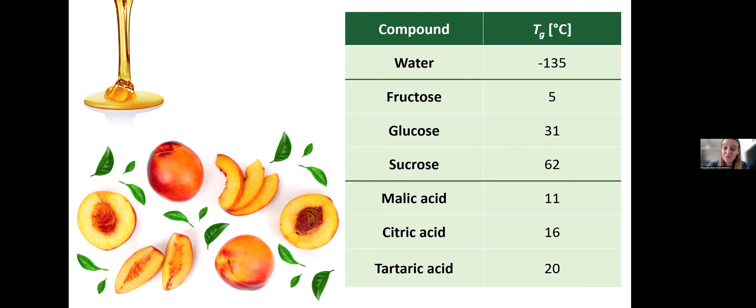This will really be a severe issue in the food industry, as it will create the stickiness problem during spray drying. The powders will adhere to the walls of the equipment inside the drying chamber. They will agglomerate, stick to each other, conglomerate, and at the end exhibit low powder recovery and difficult physiochemical properties to work with in the industry or for the consumers.

So to understand the origin of the stickiness problem in spray drying, I would like to tell you a bit about it. It is essential to discuss the concept of glass transition temperature. This is the temperature, the point below which we will observe the material in its glassy state, the desirable state. It will be brittle, and in the case of powders, it will give us the free-flowing powder.

If the material reaches the temperature above this point, the glass transition temperature, we will observe the rubbery state. The material is soft, flexible, syrupy-like, so we won't get this free-flowing powder that we can easily work with. Definitely it will cause problems with powder recovery as well, as I mentioned.

So what are the solutions normally in the industry, and what is our solution as a team working at my department? To understand a bit more about how and when we observe the stickiness problem, I would like to present you this short graph figure.

You can see that generally when we do not have any carrier in the powders and we have ambient or even high humidity of drying air, we observe the stickiness in the zone over 20 Celsius degrees above the glass transition temperature. If the material reaches this zone, we will observe the problems. The solution to it, especially in the industry, is to add carriers.

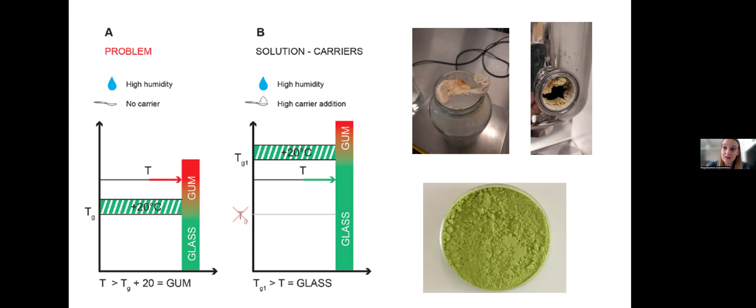However, normally in the industry, to achieve this effect, especially working with ambient or high drying air humidities, the carrier content is quite significant, around 50% of solids of the material.

So what is our solution? What we are working with is lowering drying air humidity. When we lower drying air humidity, it is possible to lower drying temperature. So we are ensuring that we are not reaching this point where we can observe the stickiness.

At the same time, we can lower the carrier content or even eliminate it completely, because it is not necessary right now if we are lowering the drying temperature, as we are moving this point a bit lower.

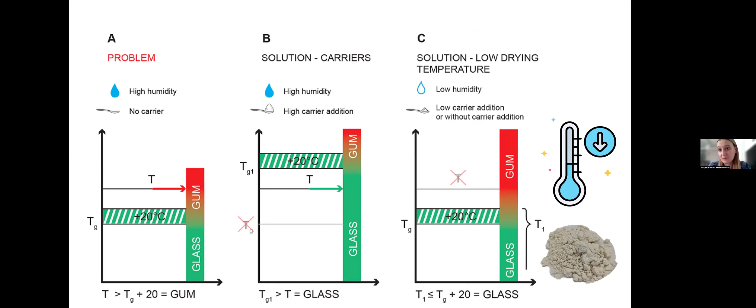In the concept of dehumidified air, basically air dehumidification is not something new. It's not a new concept. It is commonly used in the industry, in research. However, using air dehumidification as a way to lower drying air temperature is quite a new concept.

It was presented by Professor Samborska and Dr. Jedlińska in 2019. As you can see here, we have the comparison between traditional spray drying, SD, and dehumidified air-assisted spray drying, DASD.

In traditional spray drying, the drying air humidity is around 7, 8, 10 grams per cubic meter, depending on the external conditions. The standard spray drying temperature is around 180 Celsius degrees at the inlet, and at the outlet it is around 80 Celsius degrees.

Due to air dehumidification, when the drying air humidity is lower than 1 gram per cubic meter, the inlet air temperature can be lowered to 80 Celsius degrees and the outlet to 50 Celsius degrees. So you can see that the difference and the temperature drop is quite significant.

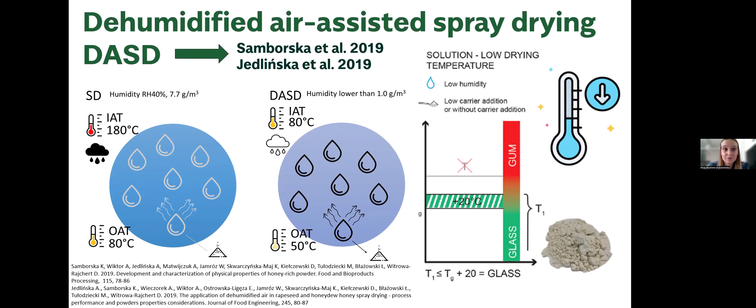As for the integration of this technique to traditional spray drying, it is just an extra unit, the air dehumidification unit, that is added to the traditional spray dryer.

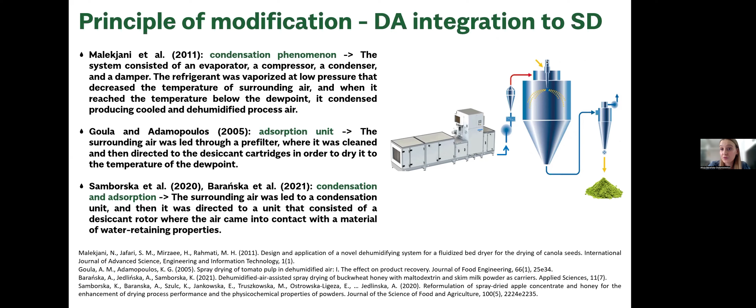Over the years in the research, air dehumidification was used to dehumidify processing air. As you can see here, there are a few different methods to dehumidify processing air. It can be used as an adsorption phenomenon or condensation phenomenon, or, as we are working at our department, it can be both condensation and adsorption phenomenon.

So what actually air dehumidification can solve the problems that we encounter with traditional spray drying. By decreasing air humidity of inlet air, we are ensuring higher driving force for water evaporation. In consequence, we can reduce drying temperature, and then we can reduce carrier content and/or eliminate it completely, which I will show you in a few of our case studies.

And what is the effect of all of it? We can reduce the stickiness problem. This is the most important thing, so we can ensure a satisfactory powder recovery, and we can omit the problems that we can have with handling of powders. In some cases, powder recovery that we observed in these studies was very high, even over 90%.

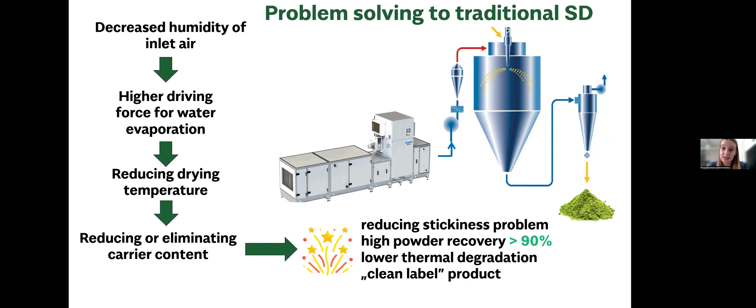With lowering drying air temperature, we can also observe lower thermal degradation of bioactive compounds, which are quite present in the materials that we are working with—fruit juices, vegetable juices, concentrates, etc. And as well, by lowering the carrier content or removing it completely, we can propose to consumers clean label products. They are right now quite interested in these types of products, as consumers have more knowledge.

In this part of the presentation, I'd like to illustrate the potential of this technology by using several examples and case studies. And I will start with the studies that were performed on honey.

Honey was spray dried using, in both of these studies, the traditional method for comparison, and obviously the dehumidified air assisted spray drying. I would like to underline that usually in the industry, specifically with honey powders, we know that 50% or even 60% of carrier per solids is added to the powder, so it is quite a significant amount.

Over here, in both studies, by air dehumidification we could lower the drying air temperature, so it was possible to lower the carrier content even down to 20%. At the same time, which was very interesting, we observed a very high powder recovery, over 80% or over 85%.

At the same time, as you can see at the bottom in this blue frame, these powders that were produced were free-flowing, so we did not observe any problems with their functionality. However, they characterized with quite low glass transition temperature, from around 7 to 20 degrees Celsius. But after producing them, they presented appropriate water content, appropriate water activity, and satisfactory flowability, which ensure the powder's stability.

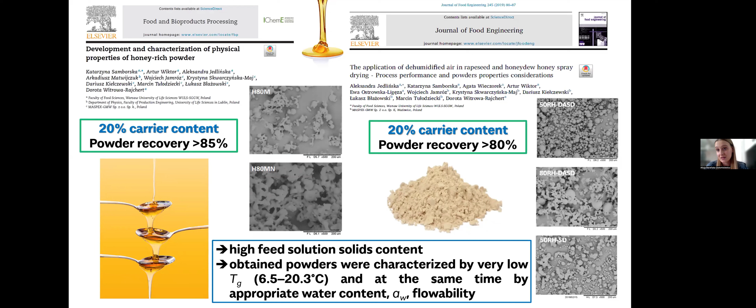Continuing with our work, the idea of eliminating the carrier completely appeared. So the first study performed with no carrier was pure kiwi berry pulp, which was spray dried in comparison using traditional spray drying with high temperatures, and using the dehumidified air assisted spray drying.

Due to the composition of the materials, sometimes it is possible to reduce the carrier completely, but sometimes not—it really depends on the material's composition. Over here, due to the high content of pectins in the kiwi berry pulp, it was possible to eliminate the carrier completely.

At the same time, with no carrier, due to air dehumidification and low drying temperature, we noted very high powder recovery, over 75%.

With sour cherry juice concentrate, which is a very difficult material to spray dry because it contains a significant amount of low molecular weight sugars as well as high content of organic acids, it was not possible to eliminate the carrier completely. However, it was possible to reduce it significantly, especially in comparison with what we observed in studies over the years on sour cherry juice concentrate.

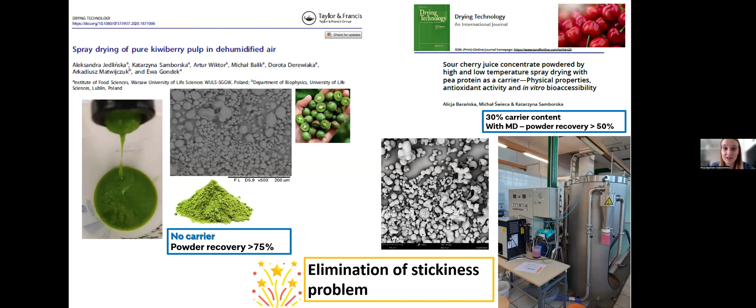As the data that we observed from eliminating the carrier completely, the idea of exploring more materials and seeing how they will react by removing the carrier using this technique.

We also spray dried the cloudy beetroot juice at lower temperature, 130 degrees Celsius. We could also remove the carrier completely, and once again we noted very high powder recovery, over 85%.

We continued the studies and examined purple carrot juice concentrate, mango puree, black carrot juice concentrate, and sauerkraut juice as well, and managed to produce powders.

In some cases, the powder recovery was not that satisfactory, but that was due to, especially for mango puree and sauerkraut juice, low content of solids in the feed material, and as well in the case of sauerkraut juice, a very significant content of organic acid. But as you can see with the concentrate, it was possible to produce powders with very satisfactory powder recovery without any carriers.

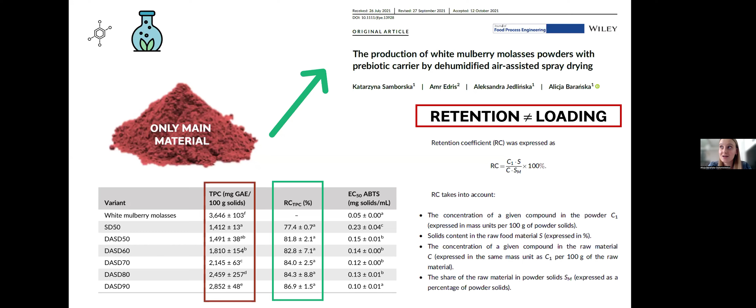Despite the advantages of this technique, obviously there are some limitations we have to think about. I would like to start with the dependence on external conditions, as this process can be sensitive to external environmental conditions because we are using air dehumidification. As we are working with air dehumidifiers, they have their limitations as equipment. If we intend to lower the drying air humidity below 1 gram per cubic meter, or even to 0, and the weather was not favorable that day—it was raining and the external air humidity was quite high—it wouldn't be possible to lower the air humidity to that really low level. That is why this is quite a limitation, dependence on external conditions.

Secondly, the implementation of an air dehumidification system definitely involves additional equipment costs, which has to be considered, especially for industrial application.

In a second, I will talk a bit more about energy efficiency, storage, and retention coefficient, the problems that we observe with retention coefficient with dehumidified air spray drying.

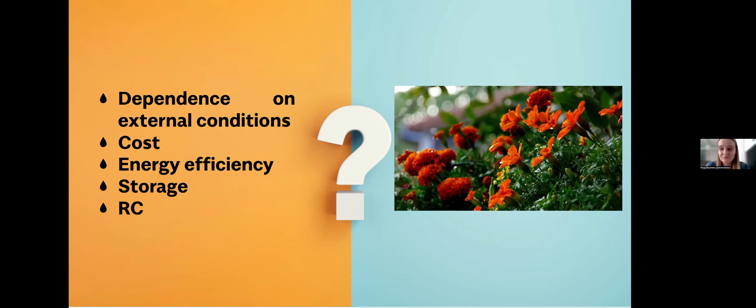In this research, buckwheat honey was spray dried with two different carriers, maltodextrin and skim milk powder. The honey was spray dried using traditional spray drying, SD, and using this technique of air dehumidification, DASD. In this research, we verified how the energy consumption, specific energy consumption, and energy efficiency change due to the change in method.

Especially for implementation in the industry on an industrial scale, the application has to be carefully deliberated because we observe low energy efficiency, but at the same time we know there are very important benefits, such as increasing the content of the raw material in the powder, increasing the antioxidant activity of the powder and its potential bioactive compounds. But as a disadvantage here, you can see the energy efficiency is quite low.

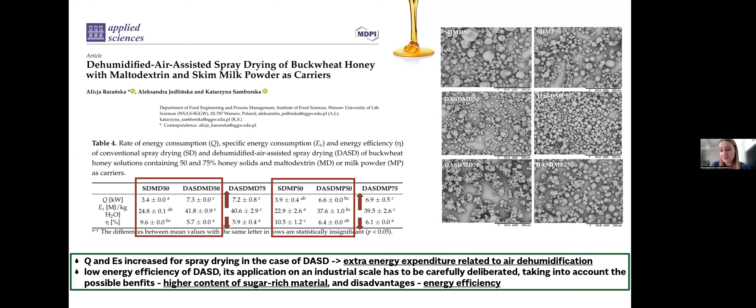With the retention coefficient, something that has to be studied more is definitely how the dehumidified air influences this parameter. In the case study on sour cherry juice concentrate, where different dairy byproducts were used as carriers, we used chromatography to verify the bioactive compounds content in the powder in comparison with the sour cherry juice concentrate.

This really highlights the complexity of the spray drying process, and definitely this problem shows there is a need for further systematic research - what really happens during spray drying, that even though we are lowering the drying temperature, we do not see the higher retention coefficient, especially when we are excluding the carrier from the calculations.

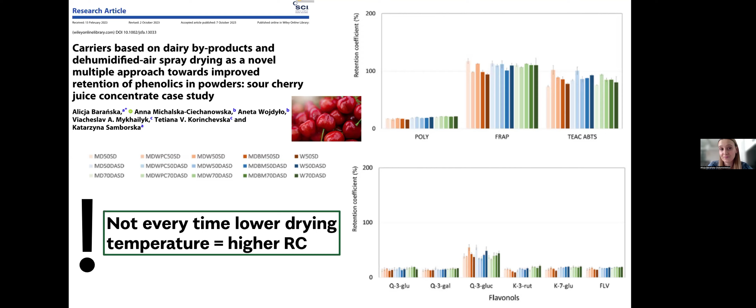One last thing I would like to mention is storage. It is a very important issue, especially for then handling the powder. Obviously, when the amount of carrier is reduced, additional challenges may arise during storage, because powders with lower carrier content may be more prone to caking due to water absorption.

Water is characterized by a very low glass transition temperature, minus 135 Celsius degrees. So if the powder absorbs water, the overall glass transition temperature will decrease and we'll observe caking and problems with handling. So definitely the storage conditions and packaging must be well thought through.

Especially in the case of powders with reduced carrier content. But what has to be studied more as well is that we do not observe right now lots of studies performed with air dehumidification in spray drying, and how it influences the physiochemical properties of powders and how they behave in storage. So this is something that has to be studied more - how to properly store the powders and how the process really influences the storage conditions, packaging, properties and handling of powders.

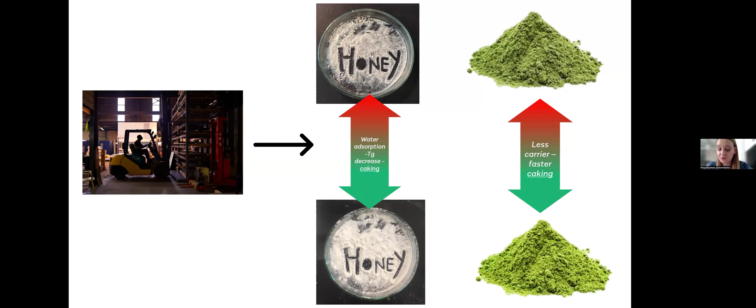I would like to mention one last thing, the industrial application. What we know from the literature about application of these methods, the air dehumidification system, is that 2 dairy cooperatives in Europe, in the Netherlands and in Poland, have for quite some time been using an air dehumidification system for their spray drying towers.

However, what we do not know from the literature is whether they are really using it to lower drying temperature. Most likely they're using it to control the humidity of drying air, not necessarily to modify the drying parameters. And as you can see, we do not find literature on application of air dehumidification in, let's say, production of fruit powders, vegetable powders - the sugar-rich materials that are really difficult to dry.

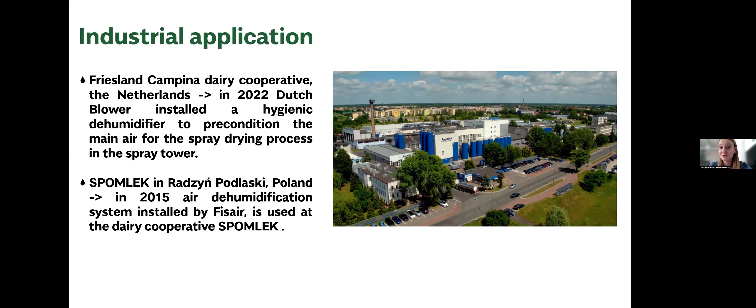To conclude this presentation and the research on dehumidified air-assisted spray drying, I would like to underline the most important thing to be taken from it: this technique resolves the issue of stickiness of food powders, and at the same time ensures very high powder recovery, in some cases even over 90% powder recovery.

Due to lowering the drying temperature, we observe lower thermal degradation - which is not of bioactive compounds, but it is not the same as retention coefficient. But what is really very important is that due to lowering drying temperature, we can lower the carrier content and increase at the same time the raw material in the powder. So we can increase the bioactive compounds potential in the final product, which would not normally be achieved using traditional spray drying. So that is very important.

Due to that, dehumidified spray drying creates the possibility for production of functional clean label products that are right now quite popular on the market. But at the same time, extra energy expenditure has to be taken into consideration, especially for industrial application, because we have this extra unit and extra process of air dehumidification. And as I already told you, with retention coefficient, we know that lower drying temperature does not always translate into higher retention coefficient, and this matter has to be studied more.

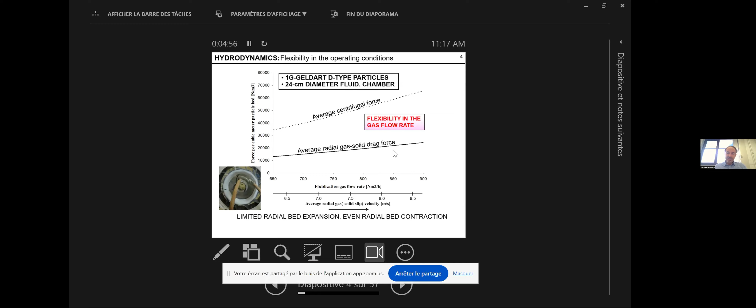So anyway, we use that principle again for coating fine particles. The problem with fine particles is that you need to work with thin slots, because you need to inject an awful lot of momentum for a given gas flow rate.

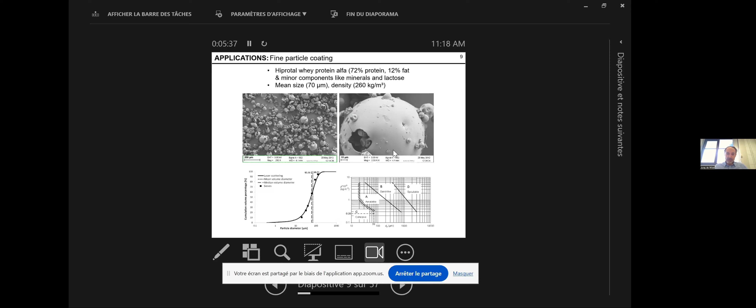So you can play with the momentum injected versus the gas flow rate injected by just decreasing the slot size or the number of slots. You inject the same gas at higher velocity, which allows higher momentum, keeping the ultrafine particles inside. The price you pay is pressure drop, but that's something you have to accept to treat such fine powders.

So we just put a nozzle in the center of this vortex chamber—this is the vortex chamber, and here you evacuate the fluid. We put the nozzle in, so we were in fact top-spraying onto the rotating bed, and then varied the conditions.

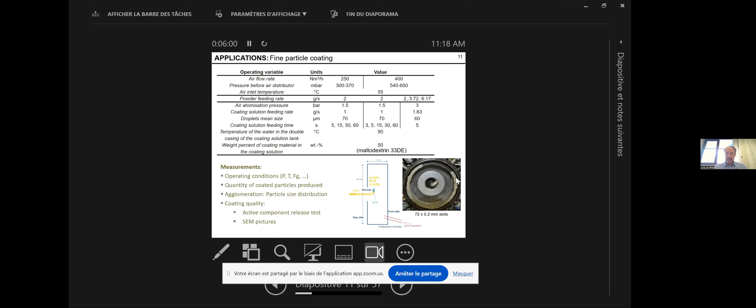They're in this table, but I can't go into detail. We tried to figure out what range of liquid and gas flow rates, and what residence time, we needed to coat the particles properly, and in what range of operating conditions we could keep the bed stable.

At too high liquid flow rates, the bed is not kept—there's too much agglomeration. But within given ranges, you can manage the drying rate so that you don't have too much agglomeration and you keep the bed fluidized.

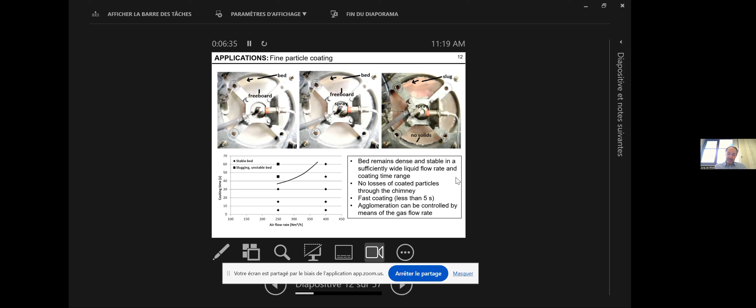So we had to find out how to properly agglomerate and coat the powder. We could control the agglomeration just by playing with the drying airflow rate—this is the gas fed into the vortex chamber. By increasing the airflow rate, you dry faster and have less agglomeration, which is what you see here.

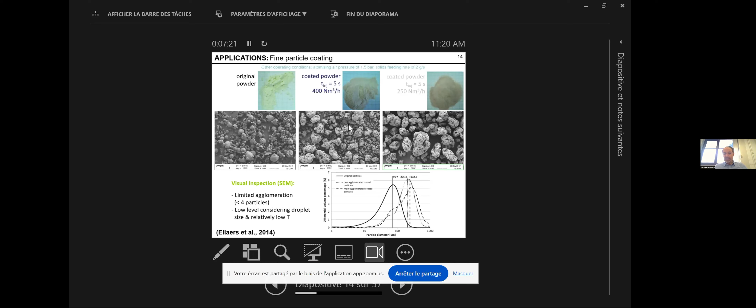At lower airflow rate, you dry a little bit slower and have somewhat more agglomeration. Here you have really minimum agglomeration. We had a very fine layer deposited, you see that here. The particles were on average, I think, 70 micron, and we deposited a layer of 1.2 micron on those particles, with very few cracks, resulting in 60% reduction of the release rate of an active component, which was fat, if I remember well.

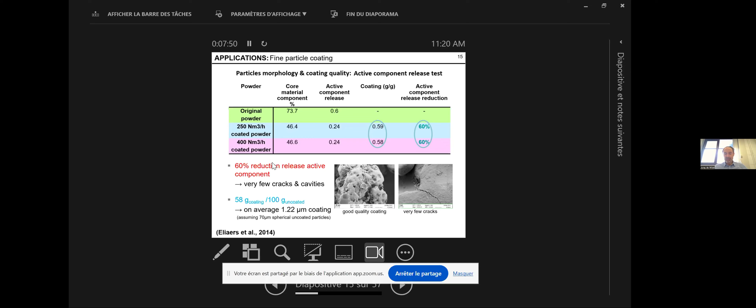From that, we started working on spray drying, and that is a totally different application because you work under dilute conditions. So far we focused on dense beds, dense rotating beds. Here in spray drying, you work more dilute. That has as a result that the rotational speeds in the chamber become much higher. You can imagine that if you have a high mass of particles in there, it slows down the rotational speed, but in spray drying applications, it's more dilute.

The objective here from our collaborators was to reduce the size of spray dryers and, if possible, improve the energy efficiency. We tried different concepts. We started from where we were working in coating and tried axial multi-zone operation.

From the beginning, we had in mind to work with drying in two steps: a fast initial drying with hot air and then a final drying with more mild temperature air. The reason for that is that you have to very fast form an initial particle, an initial crust as we call it, because as soon as the particles are evacuated towards the periphery, they can touch the walls and they should not stick. If they are not dry, you will form a paste on the walls.

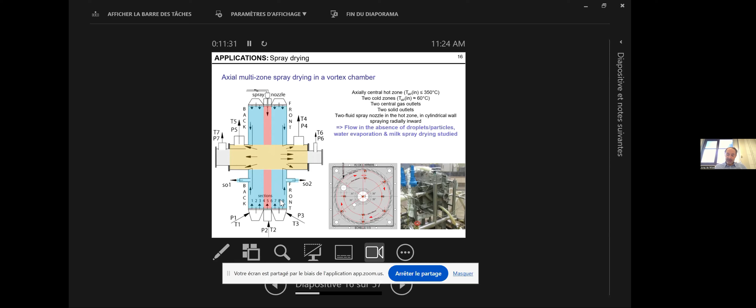In a radial multi-zone dryer, we again have drying in two steps: fast initial drying in the radial center, and then final drying simply in the periphery. The idea is to have a fast evacuation from the central zone to the periphery thanks to the centrifugal force. And so in this central zone, how do you generate the centrifugal force? By injecting mild temperature air in the periphery through vortex chambers.

So we have mild temperature air in vortex chambers in the periphery. That generates a centrifugal force. Droplets injected in the center will start rotating and be very fast evacuated to the periphery, in milliseconds. During that time, in the center, we contact that with hot air that we inject countercurrent with the droplets, and that hot air we went up to 450 degrees C.

That accelerates the drying as well, so we have very fast drying in this zone. Now, it is not because we inject hot air here that it is hot here - it is the drying that will determine the temperature in this zone. You will see in the graphs, the temperature measurement graphs that I will show, that the drying cools down this zone, and then you avoid degradation of your material.

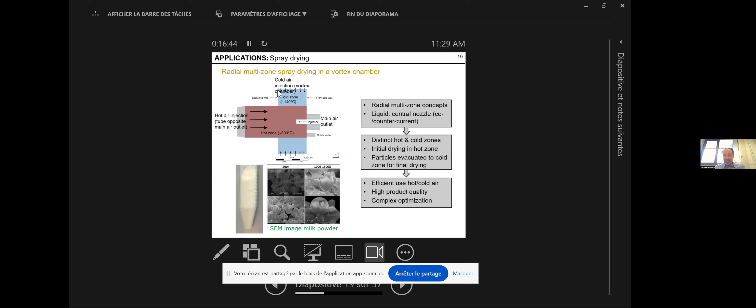So those were the things we had to face in terms of constraints on the particle droplet size. Then there is also energy efficiency and air use efficiency. In order to minimize air consumption, we do not have a vortex chamber over the entire length anymore—we have them at both ends, which allows us to also control the axial motion. You can generate a centrifugal pressure difference between those sides, and that allows you to control the axial motion.

So this is what we did in this large-scale pilot plant. This is the main drying chamber. The hot air comes from the bottom. Here is a vortex chamber, here is a vortex chamber, and cold air injected here generates a centrifugal force, and the centrifugal pressure difference allows us to control the axial motion in the chamber.

Then the hot air is injected countercurrent with the droplets which come from the top. Here is an injector. And on top of that chamber, we have a cyclonic extension, as we call it, which allows us to improve the separation of particles and air before the air is evacuated via the main air exhaust, which is here.

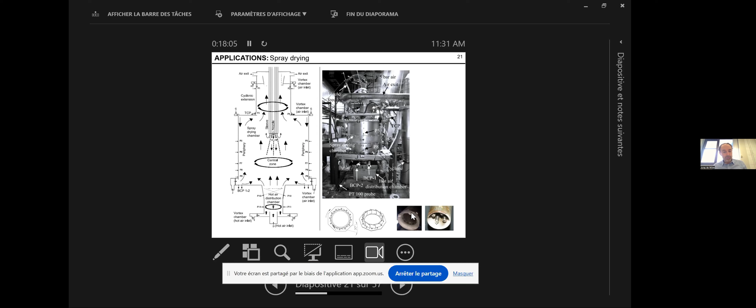Those in the center—in order to contact the hot air efficiently with droplets, you want a high droplet concentration. So we use 4 nozzles in parallel. We developed a protecting sleeve, a bit similar to what they use in commercial spray dryers, and in order to prevent fouling, we inject some secondary air through this sleeve to keep our nozzles clean.

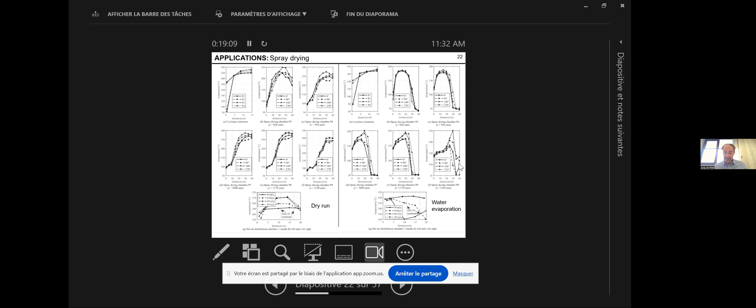So only if those profiles are convenient, we switch to spray drying tests. Spray drying tests we did with milk and maltodextrin. These are examples of maltodextrin tests. We did many bad tests and some good tests in the end.

Then we do, of course, all the analysis that it needs. We have microscopic analysis. Some we went too low in vacuum, so the particles exploded, they fragmented, but under the normal microscope you can see that we have quite spherical, hollow particles produced. And then we do all the analysis on those particles that you are familiar with, particle size distribution measurements, roundness distribution measurements, and so on.

You can see here how much of the powder is collected via the different collection ports, where the powder comes continuously out. And then we have some powder remaining in the chamber. Then we have some powder collected in a downstream cyclone, very fine powder. And that is, we measure all that in order to evaluate the efficiency and the performance of this device.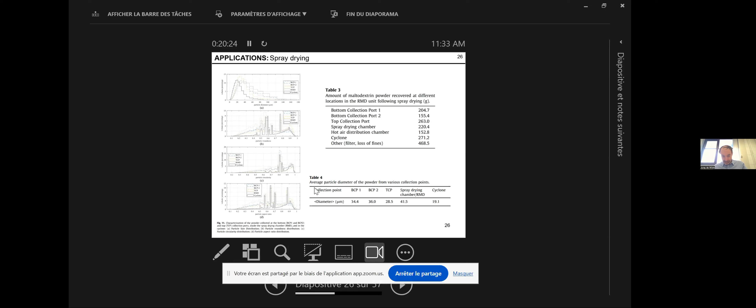I'm almost out of time, so I will have to stop here. So these are indeed roundness, circularity measurements, aspect ratio measurements, and then we compare sieve analysis with diffraction measurements.

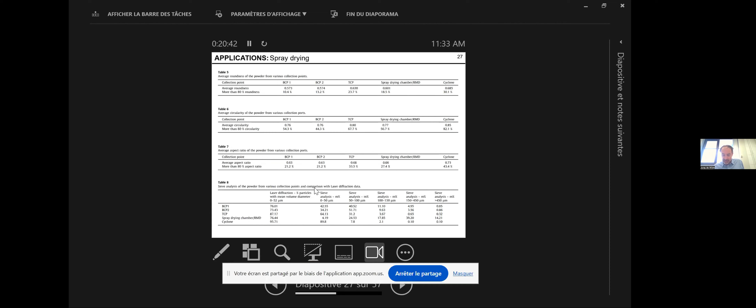Some words about it, because there is always a question about the energy efficiency. We are about 15% better than normal spray drying so far, and we do not do any heat recovery at the moment. This is an experimental pilot plant, so the air goes out and we do not recover energy. We have electrical heating also, so all that is taken into account, but we are about 15% better than the normal spray dryer. We could theoretically predict that.

This is a theoretical analysis on the spray dryer capacity, and we measured that as well. We measured feed temperatures, how much power we use, and then how much water we evaporate finally, and that's it. And we have an efficiency around 53%, I think, 53 to 56%.

I think with that, I'll close because it's time for the next speaker. In the meantime, we improved the performance. I cannot show this yet.

What I show you here has been published in Advanced Powder Technology recently, so you can find the details there. But in the meantime, we did better tests improving the hot air distribution. You need to have a very uniform hot air distribution in order to have symmetry in the chamber, and that is very crucial if you want to improve the performance, which we did over the past months.

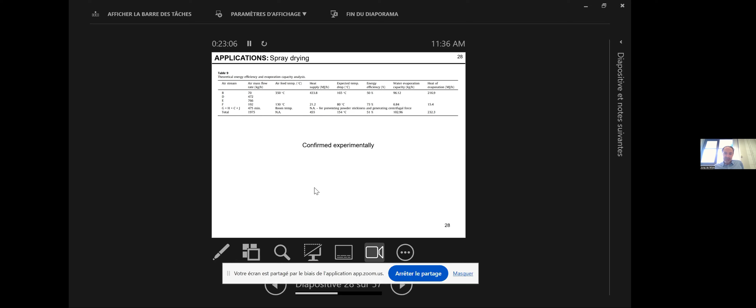That is what I forgot to say, but which is critical, of course, for what we try to achieve. So high G operation using vortex chambers is promising, but it's not an easy technology to develop, and there are many aspects that need to be understood. We are working on that for various applications, and I focused a little bit on spray drying here today.

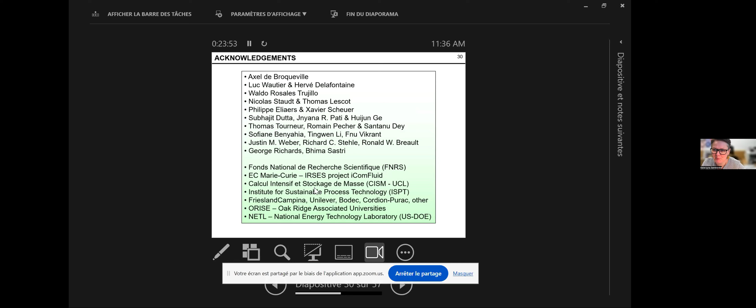Thanks a lot for your impressive presentation and the work also which was done. I was planning to ask about these capacities, but you have explained. Thank you. Do we have any more questions from the audience?

Can you say a few words maybe how it started, this idea? Was it your idea, or was it adapted from some other solutions? Well, from the fluidized bed, yes? We started from the high G fluidized bed.

Now, this is something, if you look in the literature, people looked at. The original idea here was to use it for polymerization because it's an extremely exothermic reaction, and you need to evacuate a lot of heat. By having high gas flow rates, you can evacuate heat efficiently. You can also improve the heat transfer and so on. So the idea was to use it for gas phase polymerization.

But then looking in the literature, we found that in the 60s, there were studies to use that for nuclear applications, for space applications, and also for drying applications in agriculture. And then the research stopped for almost 30 or 40 years. And then we had this idea, and then almost every time when you have an idea and you look in the literature, somebody else had the idea already. Already done.

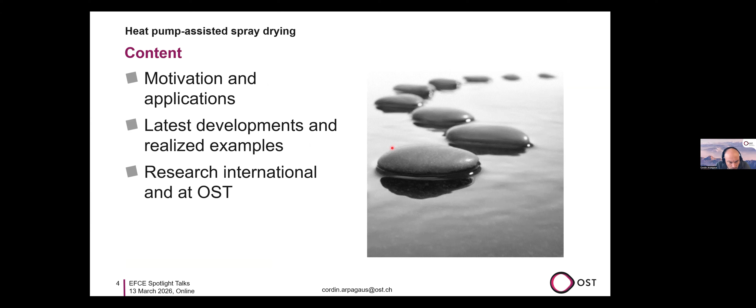So first, I'd like to give you latest developments and realized examples. Then we go into some research activities at our institute and also some international view, and then some conclusions at the end.

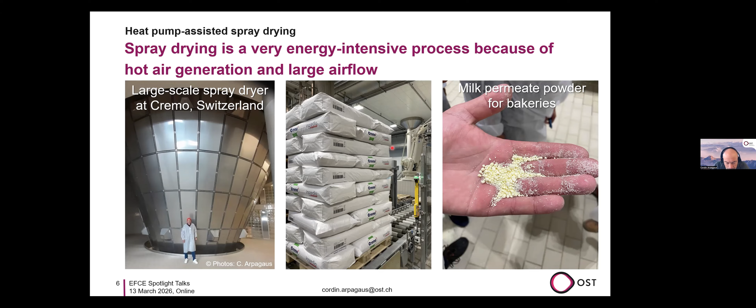So a spray dryer is quite an energy intensive process because we need to heat up air, and this at very large airflows. So here on the left, we see a large spray dryer, and I'm standing in front of it. It's a spray dryer for producing milk permeate for bakeries, for example - big, high volume products.

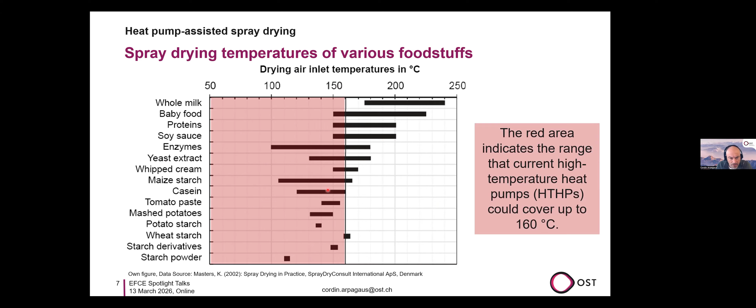Nowadays, technology is somehow limited to about 160 degrees. That's not a clear number, but there are more and more suppliers, heat pump manufacturers, that can reach these supply temperatures. I was a product manager for Büchi Labortechnik for 5 years - this was my former job after my PhD - and now they have the mini spray dryer

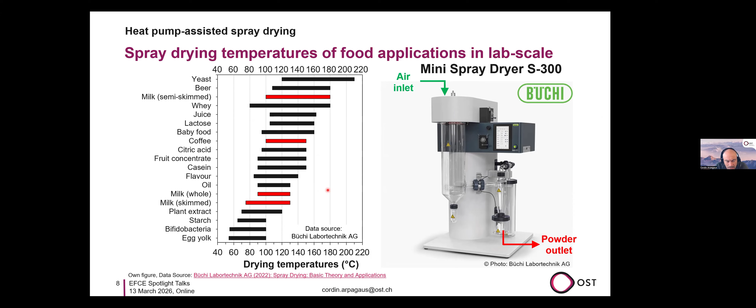S300. It's a very comfortable spray dryer for lab tests with an evaporation capacity of about 1 liter of water per hour. I think many researchers use this machine in their labs, and here we have a lot of application material from Büchi, also a list of possible drying temperatures for different food applications - for example, coffee in the middle at about 150 degrees. It's also interesting to know.

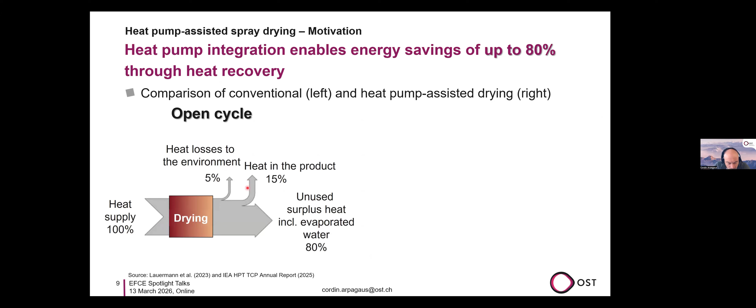So why now integrating a heat pump into a spray dryer? The major motivation is to save energy. Today we would have an open cycle - for example, we have here on the left some heat that is used to heat up the air, and probably 80% of it will go into the real water evaporation. The rest will be some losses, and some heat goes into the product.

Now, if we can close this cycle with a heat pump, using the exhaust humid air as a heat source and upgrading it with a heat pump to inlet air temperature again, we can close the loop, and so the heat supply can be reduced a lot. Theoretically, this could be 80% heat recovery in such a closed loop. This is valid for any drying process, but especially also for spray drying processes.

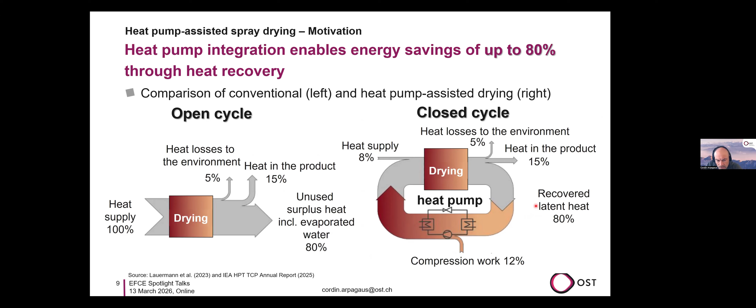The hot water goes into the air inlet line of the spray dryer and heats up the air up to about 120, 130 degrees. On the cold side of the heat pump, there is the possibility to use the exhaust air of the spray dryer as a heat source to recover this latent heat, or to use the cold side also as a cooling water loop. So both sides of the heat pump, the hot and the cold side, would be useful in this case.

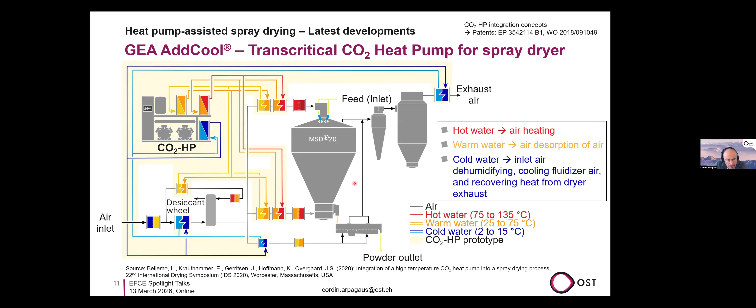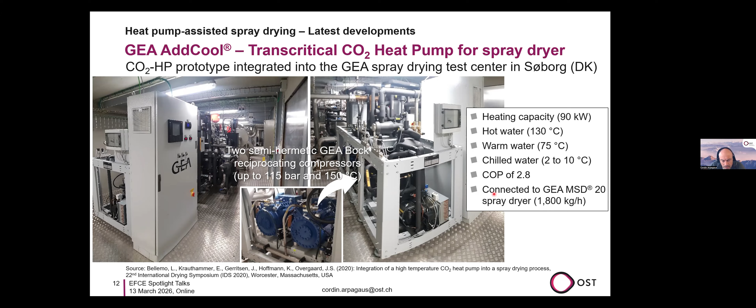So it's a pilot test setup, connected to a spray dryer, the GEA MSD20, which has 1,800 kilogram per hour evaporation capacity. With this test facility, they improved their technology, and now they have a larger system at Arla Foods in Denmark as well, where they implemented this CO2 AddCool technology at this dairy, the milk powder facility.

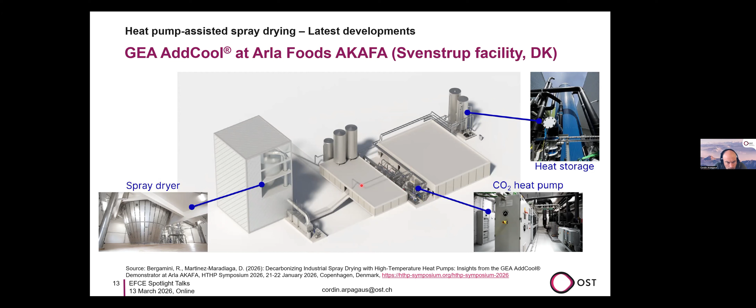Here you can see how this looked like. Here is the spray dryer on the left, here the heat storage tanks, and here in the middle the CO2 heat pump. This was presented by Riccardo Bergamini from GEA recently in January in Copenhagen at the High Temperature Heat Pump Symposium. So the system looks like that.

We have the heat pump here that produces chilled water, and then upgrades this heat source to 130 degrees, which then heats up the air from 20 degrees to 120 degrees. And so for the rest of the air heating, there is additional steam needed and probably also electricity.

So the message here is this CO2 heat pump technology manages to go up to 120 degrees. The rest is still, there is still another heating technology needed.

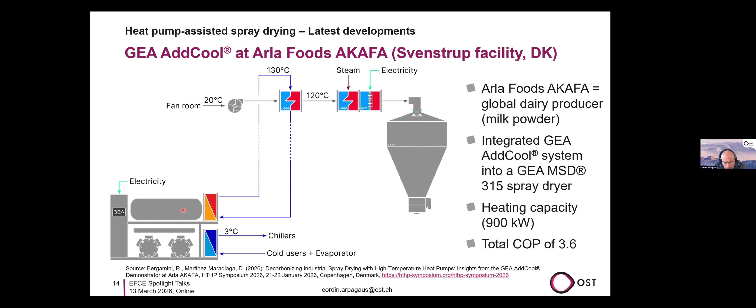So this is at Arla Foods, they integrated this GEA system in an MSD 315 spray dryer, so 900 kilowatt capacity, 10 times larger than the test facility shown before. The total COP, so the coefficient of performance, is 3.6, which means with 1 kilowatt hour of electricity, 3.6 kilowatts of heat and cold can be produced with this system.

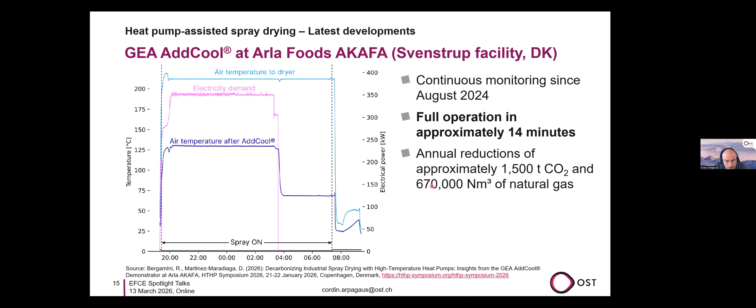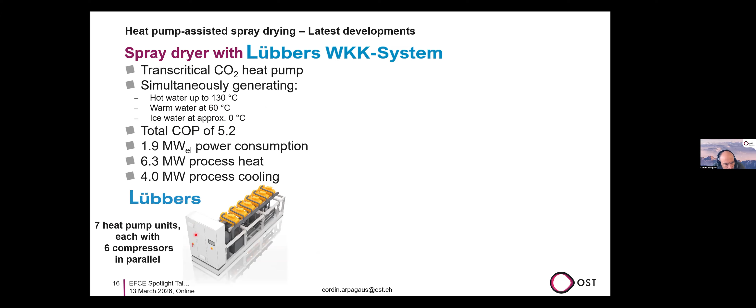This is on a larger scale, in the 6 or so, 4 megawatt heat and cold. What they use is in principle 7 of such CO2 heat pumps, and one of the heat pumps has 6 compressors. So this will be then a parallel arrangement of this heat pump installation.

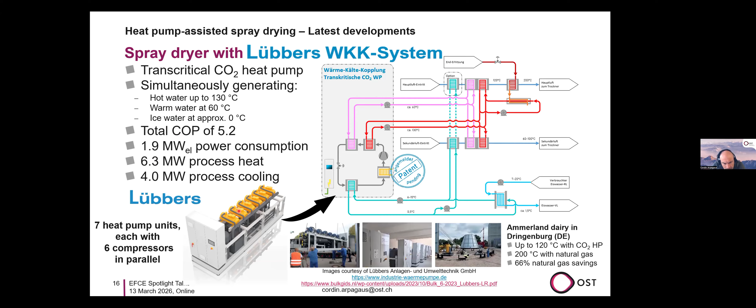Here is a schematic of their system, but in principle, similar thinking steps. And then this has been integrated in a dairy in Ammerland, in Dringenburg, in Germany.

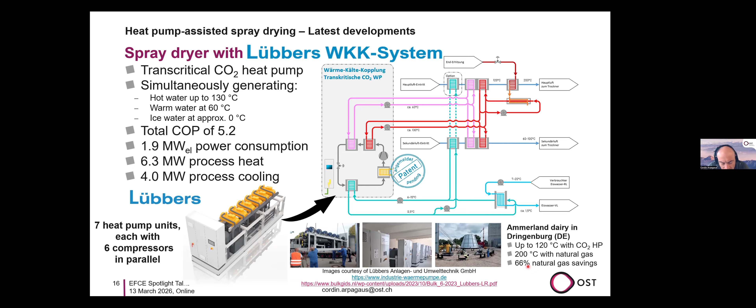And here you can see some pictures of these heat pumps, how they were delivered, and also the spray tower, how this looks like. And with natural gas, they would go up then to 200 degrees. So natural gas is still needed to reach the 200 degrees. But anyway, they can reduce or save 66% natural gas with this electrified heat pump assisted spray dryer technology.

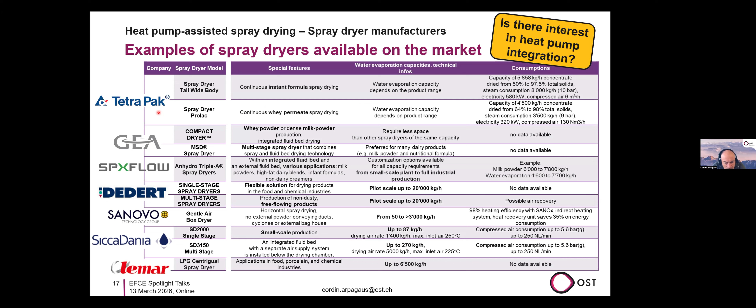Then there are other spray dryer manufacturers around the world, and here are some names, some examples. My question is, is there interest in heat pump technology as well from other suppliers? Just made a list of this in a table, won't go into details here, you will get the slides later on. But more important is that the spray dryers are large, so the reduction potential is much larger for these energy intensive processes.

So here we are in the 20-ton water evaporation per hour range. For example, this will be then also a large heat pump installation.

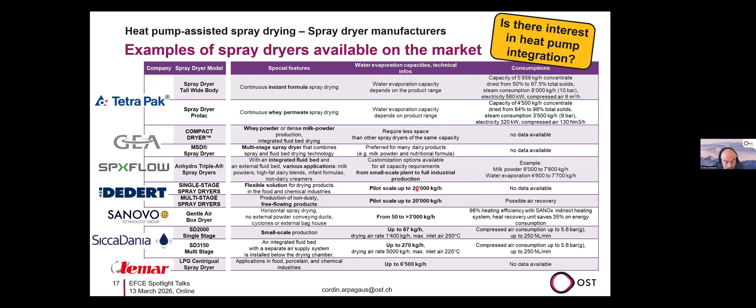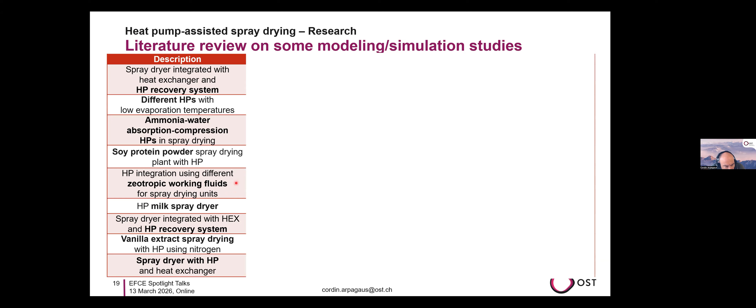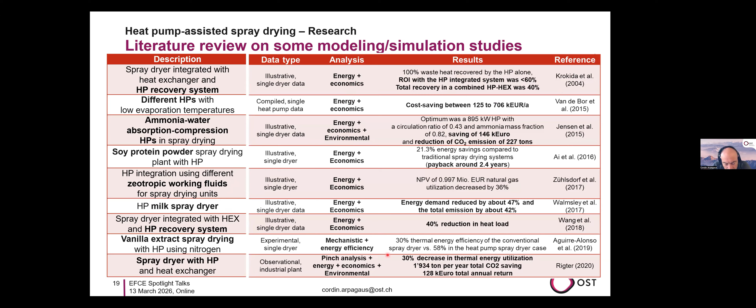And what are the results? So they typically do energy studies and economics studies. Some have environmental studies as well, or pinch analysis as an energy analysis method, which gets more and more popular also for spray dryer processes.

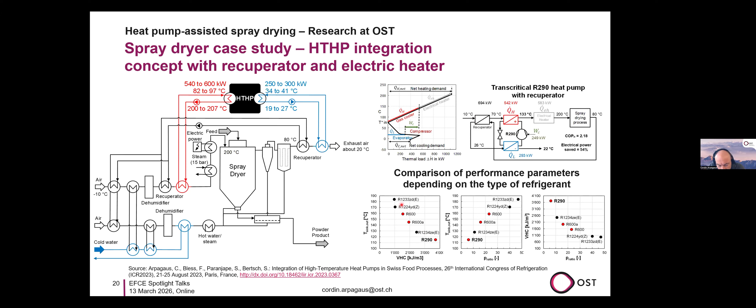What is the parameter to investigate is in principle the working fluid in this heat pump. So in this case propane, or here we have different other gases or refrigerants, as we call it in the heat pump community. You have propane, butane, for example, and some other synthetic refrigerants. It's always a compromise between efficiency and volumetric heating capacity. As you can see for propane, this achieves a very high heating capacity, but the sink outlet temperature, the achievable temperature, is limited to probably 130 degrees. Like CO2 was also somehow limited to 120 degrees in the former case. With other gases we could reach 160 degrees, for example butane. And then this gives some compromise.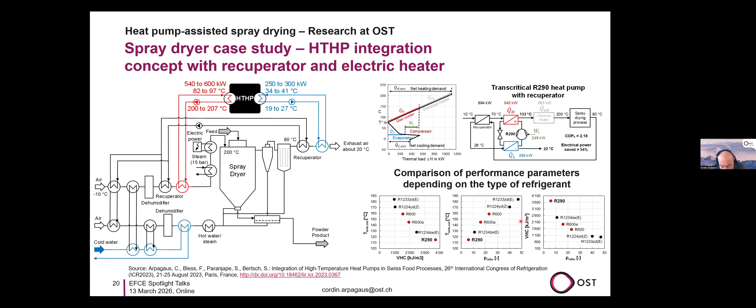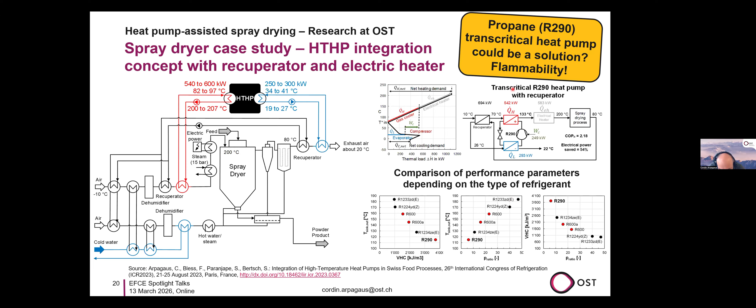Okay, so propane was found to be quite a suitable solution, but it is flammable. So would this be allowed in a spray dryer facility to have a flammable gas inside this spray dryer? That's a good question.

CO2 is definitely also a good choice, and that's probably the decision why other companies use CO2. Anyway, from a research point of view, it's still an interesting field to use flammable refrigerants in a transcritical state.

This is what we have built here at our institute, at OST, at our university. We have a transcritical heat pump that works with hydrocarbon fluids, mixtures actually, 20 kilowatt capacity. It's a lab scale demonstrator. Here you see the heat pump with the compressor, the gas coolers, and some other measurements, valves, expansion valves. And here on the right, the cycle with the piston compressor, gas cooler, expansion, and the evaporator.

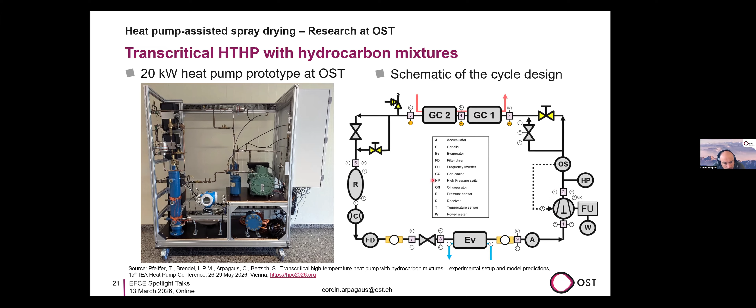I don't want to go into too much detail here, but the main goal is to show experimentally that a mixture is more efficient for a dryer application than a pure fluid.

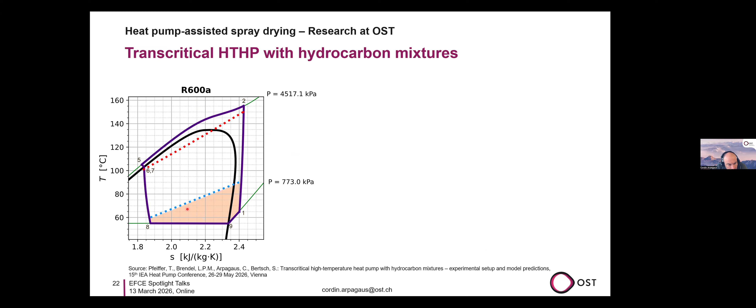Here on the left you see a TS diagram. If you are familiar with heat pumps, this is one of our main diagrams to illustrate a heat pump cycle. We have the evaporation, then the compression, and then the gas cooling with isobutane, another flammable gas, a pure fluid, heating up the air or water from 100 degrees to 150 degrees. The case would be like coffee spray drying or something like that on the heat sink side. You see this matches quite well here, the heat transfer. But on the heat source side, the match is not so good - there is quite a difference in the heat transfer temperatures.

The goal now is to use propane and isopentane, a mixture of 60% to 40%. Here the graph shows the situation - you see the area on the source side gets smaller compared to before. What does it mean? We can reduce exergy losses, the heat transfer gets better, and overall the heat pump COP, the efficiency, can be increased by this additional parameter of using a mixture of hydrocarbons. That's the main motivation, to match the temperature glides better on the source and sink side.

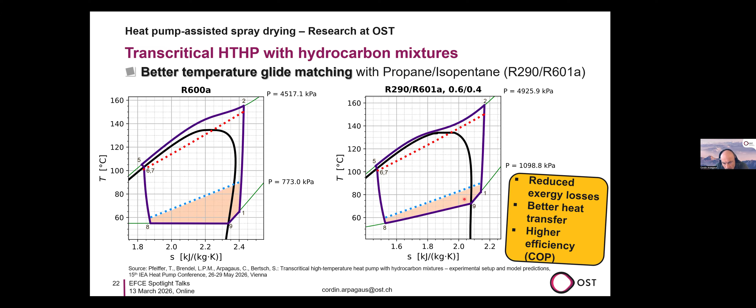This is almost my second to last graph, but it shows some theoretical simulation results of this special hydrocarbon mixture of propane and isopentane. Here is the isopentane mass ratio - so here we have 0, meaning on the left we have only propane R290, and on the right it's full isopentane.

Then you can see the black curve, that's the COP. You see a maximum, and this means at 40% isopentane and 60% propane, the efficiency is highest for this particular application.

So now we can see what is the benefit. If you would use only isobutane, a pure fluid, then we reach a COP of about 2.6. But with the mixture, we reach 2.85 - so a 10% improvement of COP just by replacing the working fluid with a more optimal one.

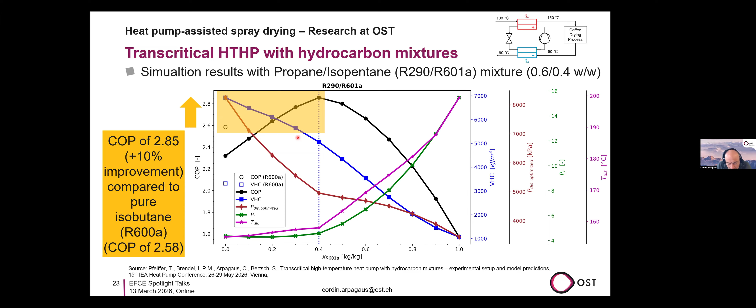This is the main motivation from research, and hopefully we can convince suppliers of heat pumps in this direction. A spray dryer typically also has a fluidized bed and a vibrating fluidized bed.

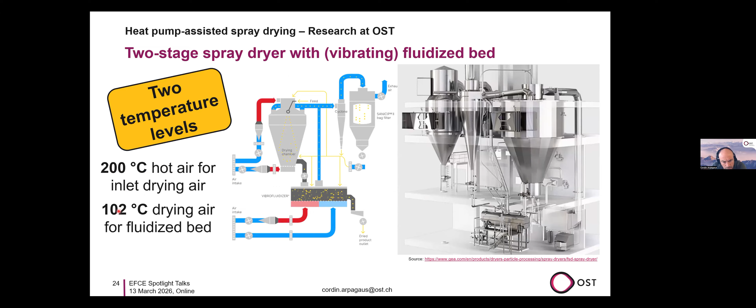We have actually two air streams that go into a spray dryer system. One is at probably 200 degrees, like for milk powder drying, and the other is at a lower temperature, maybe 100 degrees. So what would be the best heat pump design? And this is the question.

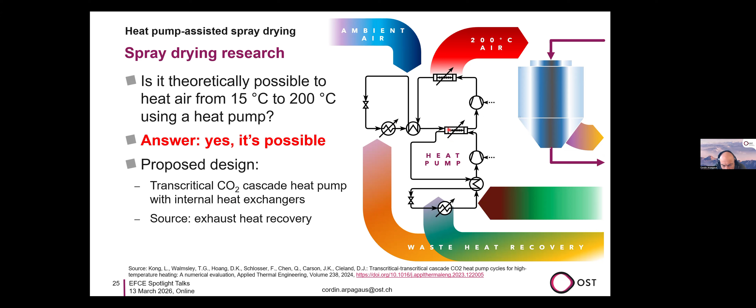Is it theoretically possible to heat up air from ambient temperature to 200 degrees with a heat pump? The answer is yes, it's possible. But we need to think about the best cycle design. The proposal is to use a transcritical CO2 cascade heat pump with an internal heat exchanger. Here you see the cycle - this has been evaluated by colleagues from Waikato University in New Zealand, Lana Kong and Tim Walmsley. They show that this system could work with CO2 compressors available today with 150 bar discharge pressure, so 200 degrees can be reached.

It's a theoretical study, but we also did the model of this heat pump cycle. What is the message here, what is the application? We have ambient air coming in at some 15 degrees, then a first gas cooler from the heat pump, and then 102 degree air for the fluidized bed, with another part of the air coming out at 200 degrees - that's the heat sink side. On the heat source side, we would use water from the exhaust stream of the spray dryer.

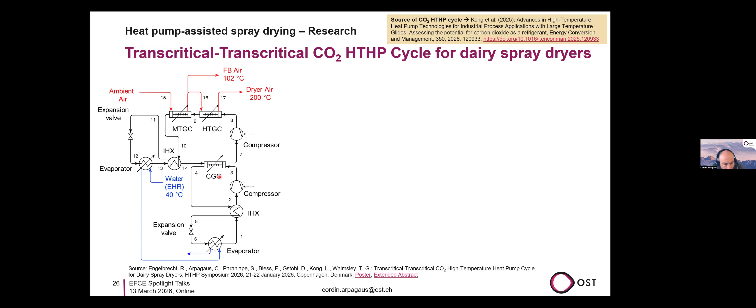And then this is probably 40 degrees, goes into the first evaporator and then into a second evaporator. With this type of cycle, it's possible to achieve a heating COP of over 2.5. So theoretically, this is quite an interesting result, because the COP is also a very important economic factor, since a heat pump which is electrically driven has to be compared to today's gas or fossil fuel boiler systems.

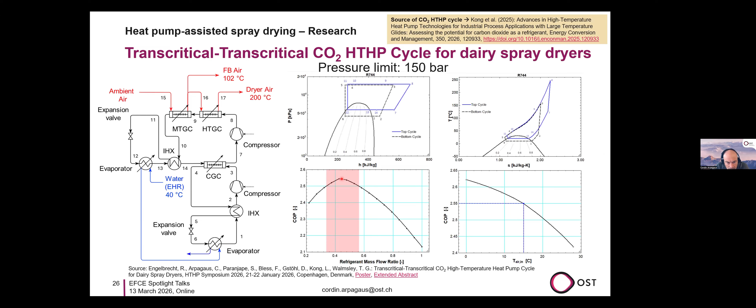So that's the message here, that we have some cycle optimizations that are possible. I'd like to conclude my talk. So why does spray drying keep us busy from a heat pump's view?

First, spray drying is a very high energy intensive process, so we need a lot of energy. It makes sense to look into technologies that can reduce the energy demand. Heat pump integration enables that. From theory, we can close the cycle, make a closed cycle system, use the latent heat, and reduce energy consumption, and also shift from fossil fueled heating to hopefully renewable electricity heating, and this way decarbonize a spray dryer process, especially in large scale. That would be a major point.

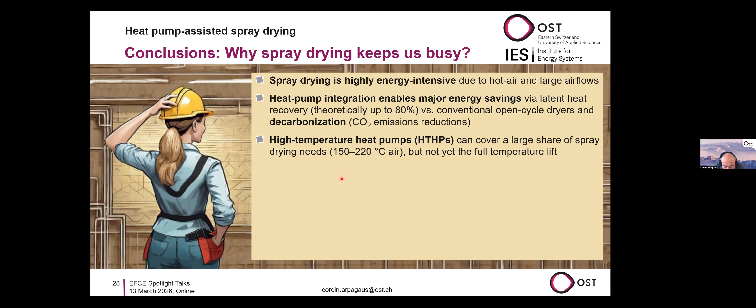Then about heat pump technology. Today there are heat pumps available that can cover a large part of the spray drying needs, but not fully. The 200 degree is still a challenge, but probably 160 degrees or so is maybe today from some suppliers possible and state of the art. We have seen some realized examples from GEA and also from Lübbers, and here we have some data from the pilot installation and also from the larger installation at Arla, where they have some monitoring data that they can share.

And for larger systems, also the idea to use the heating and the cooling of the heat pump simultaneously is a major benefit of these heating and cooling technologies. So typically in a spray dryer, you have a cooling stream or a cooling loop that is there to cool down the produced powder.

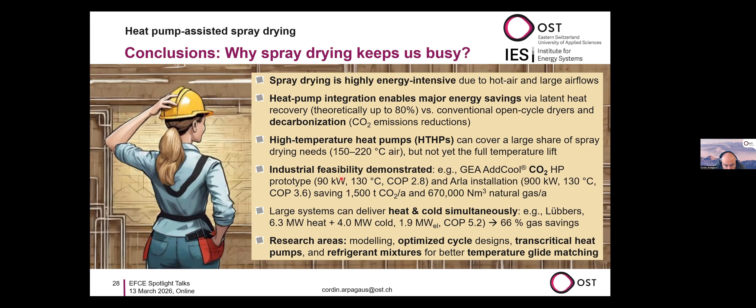From a research point of view, we have several areas that are active. One is for sure modeling and simulations. Then we had this optimized cycle designs. We have seen some ideas with CO2 as a refrigerant, then this transcritical cycle and refrigerant mixtures to better match the temperature glide on the heat source and heat sink. So last one.

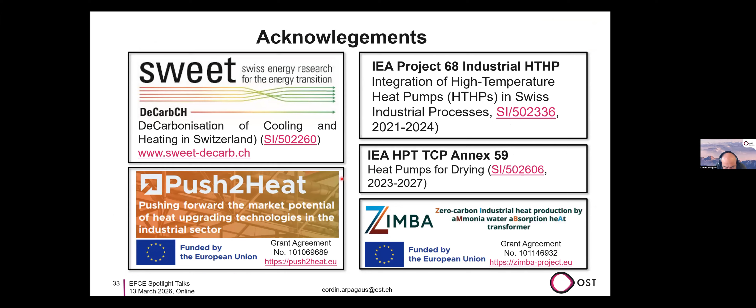Thank you. Thank you for your impressive presentation. It's good to know that some of these systems are already working in the industry, but still you have some job to be done, so we are still busy with your great team. I don't know if there are any questions. It was so informative that maybe we know everything now. Let's wait a second if anybody wants to ask.

I cannot see. I can ask a question if you... Maarten. Yeah, so thank you very much for a nice presentation, Cordin.

I'm just wondering, because coincidentally in the Netherlands we had a full day of heat pump presentations related to drying. One of the things that came forward was also the stability of heat pumps and how they operate. They are quite sensitive to fluctuating energy flows and these type of things. So is that also an area of research that you're considering? Because you want to have them operating in a robust way and also to start them up, for example. Yes, this is a very important research area because reliability and stability is one of the top needs of these machines and these processes.